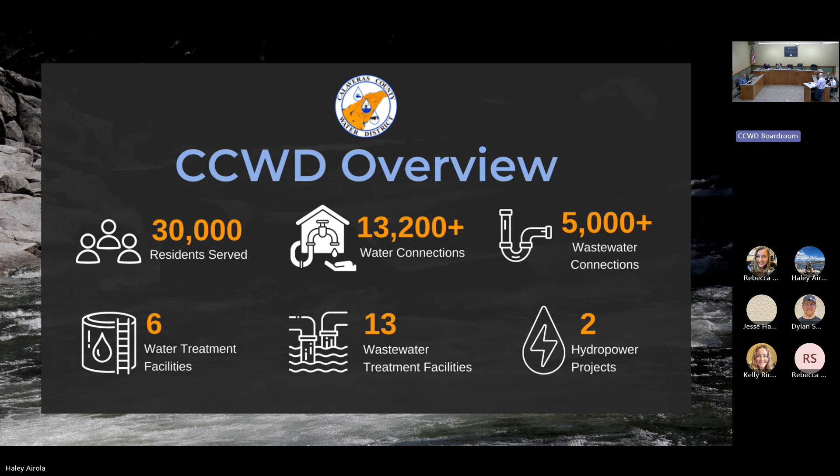So just a quick overview of CCWD. I think you guys have seen this slide before. Over 13,000 water connections, over 30,000 residents served. We have 6 water systems, 13 independent wastewater systems, soon to be 12. There's a lot going on, a lot of infrastructure across the county that we're responsible for, and fire hydrant O&M is another key component to ensure the success of our distribution systems.

We have 2,265 fire hydrants across those 6 water systems, and we work with the fire departments and their staff to have those inspected annually. So we pay a little under $60,000 a year to the fire chiefs and their teams so that they can go out and inspect these and report back to us their condition.

Part of that effort includes training on behalf of CCWD staff for new and volunteer fire folks and summer interns, so that we can ensure the water system stays intact while they inspect and check these fire hydrants. Here's an image of a previous supervisor out in the field conducting one of those training sessions.

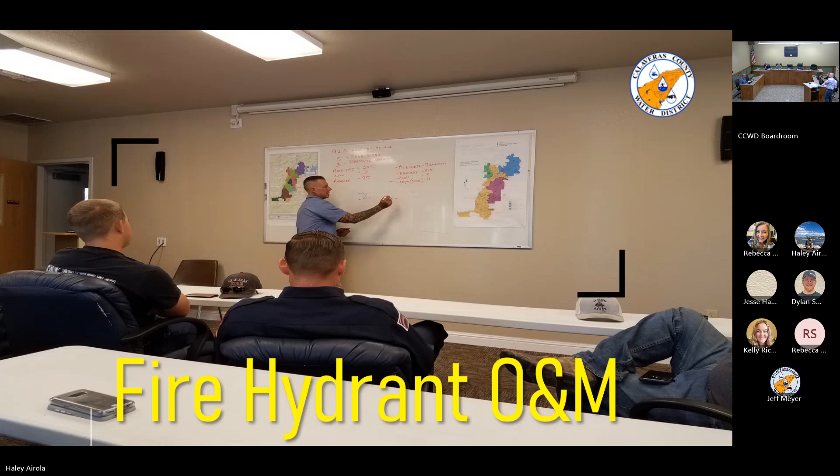So one of the challenges that we have out at Copperopolis and in the Jenny Lind water system is the presence of naturally occurring iron and manganese in the system. How those systems are flushed is really important. If when the hydrant is inspected, the folks just kick the hydrant on full bore, they can stir up settled manganese for hundreds of yards, if not thousands of yards in the system, and that takes hours to evacuate. So we work with the team to make sure that doesn't happen.

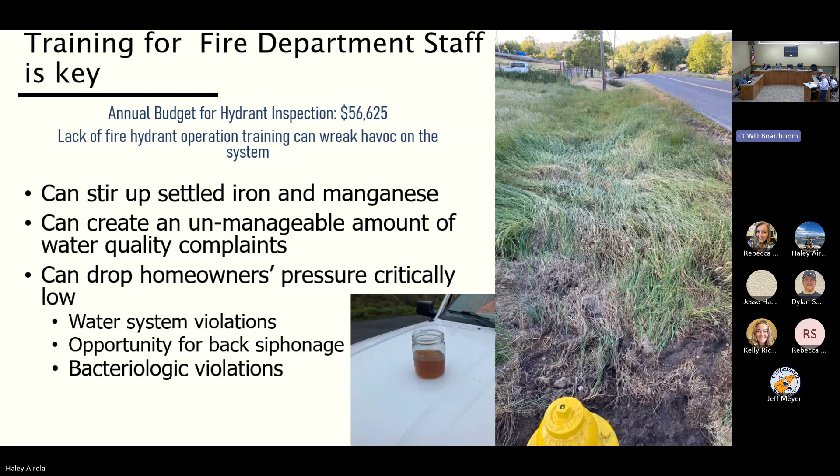So we work really closely with the fire folks to make sure that when they do inspect the hydrant, they focus on just basically giving it a burp test or a squirt test, evacuate some of the water that's just in the hydrant itself, and then statically pressure test it.

These images illustrate Chief Johnson, who was super helpful to our team about 6-8 months ago, wintertime. Our distribution crew went out with his interns up on the pass, and we went through some fire hydrant testing, super helpful.

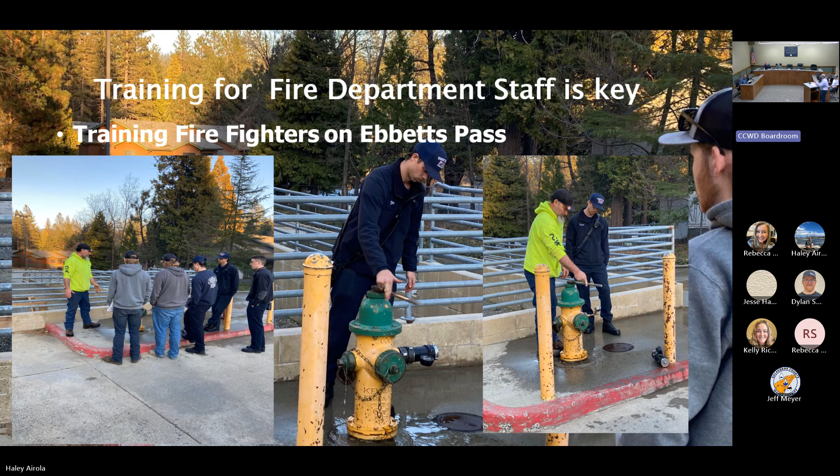I think it helped our folks develop a rapport with the interns, which is really important - it has to happen throughout the organizations. To this day, we get notifications here at the district every time your folks are out in the field to inspect, we get a phone call. We put our folks on notice so they can go touch base with whoever's going to inspect a fire hydrant. It's really helpful, and it keeps all of our folks informed.

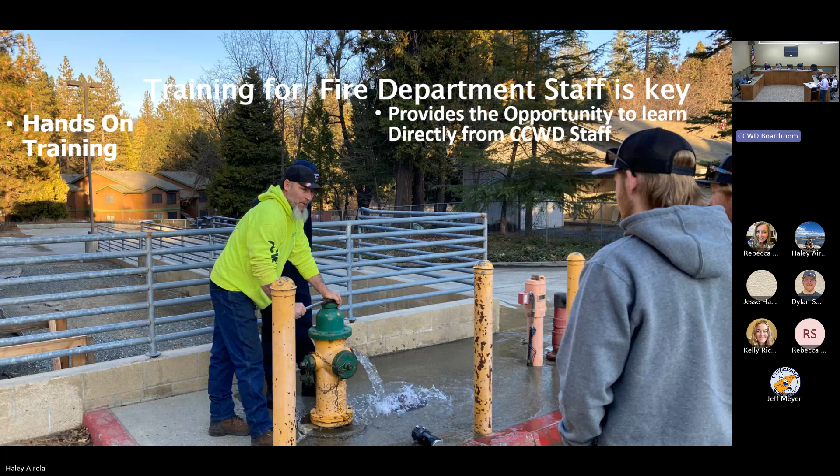This is an image of our supervisor up on the pass during the wintertime, Joe Darby, showing everybody how he would like to see things take place when it comes to fire hydrant inspections.

So what are the hydrants inspected for? This is an illustration of a sheet from the Calaveras Consolidated, I think it was Jenny Lind, their inspection form that they use. They look at operating condition, ease of access to the hydrant, roadway reflectors, burrs, is the cap hard to get on or off, is the stem lubed. They log the static pressure and note any anomalies.

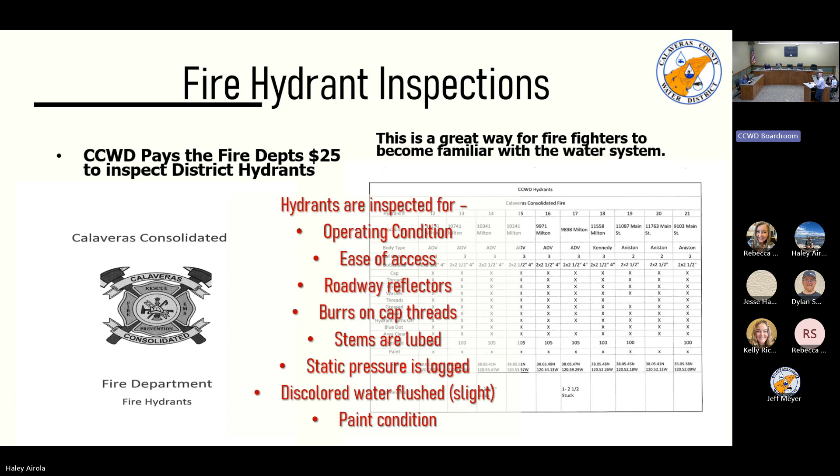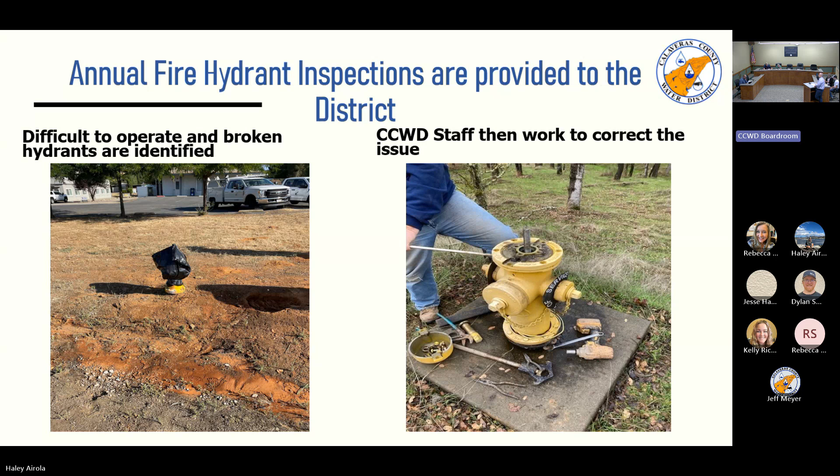This document actually informs our distribution and construction crews for hydrant replacements and rebuilds. The image on the left is a bagged, out of service hydrant. The image on the right shows our distribution folks tearing a hydrant down to rebuild it and put it back in service. The interrelationship between the fire folks and our distribution crews for that effort is super important.

One of the challenges we face throughout our water systems is a lot of the hydrants don't have guard valves or isolation valves.

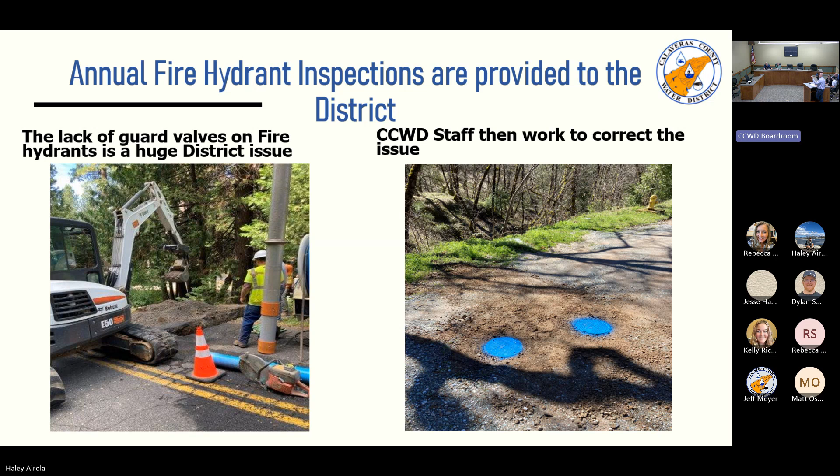So that's actually kind of related. We're talking about fire hydrant O&M in this presentation, but capacity, flow rate, and volume are also critically important aspects. I talked a little bit about PPCs or ISOs in this presentation, and that touches upon that aspect of the water system.

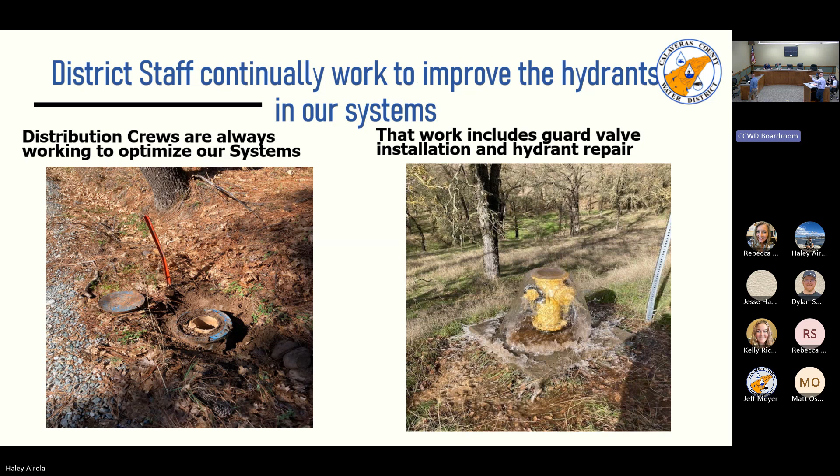Here's some more images of cleaning out a fire hydrant, basically taking all the internal components out and flushing it, then putting brand new internal components in. Luckily they have rebuild kits for fire hydrants. You can replace the bushings, valves, gaskets, O-rings and whatnot, and put it back in service.

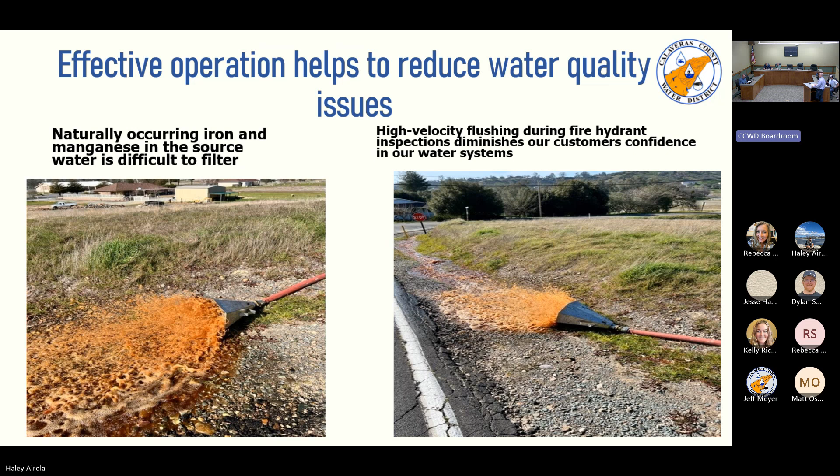Here's an image of manganese flushing. So like I said, continual effort. I think long-term consideration, this being the engineering committee, Kevin and I have talked about engineering the exclusion of manganese through a different process potentially in the future for the Jenny Lind and Copper Cove water systems.

Wouldn't you say that one of the most unfortunate circumstances of this manganese accumulation is customer calls? Absolutely, and the erosion in the confidence of the water supply. That's also a big challenge, which is why it's so important that we work together on flushing and on when there's issues, when you have to flow a line.

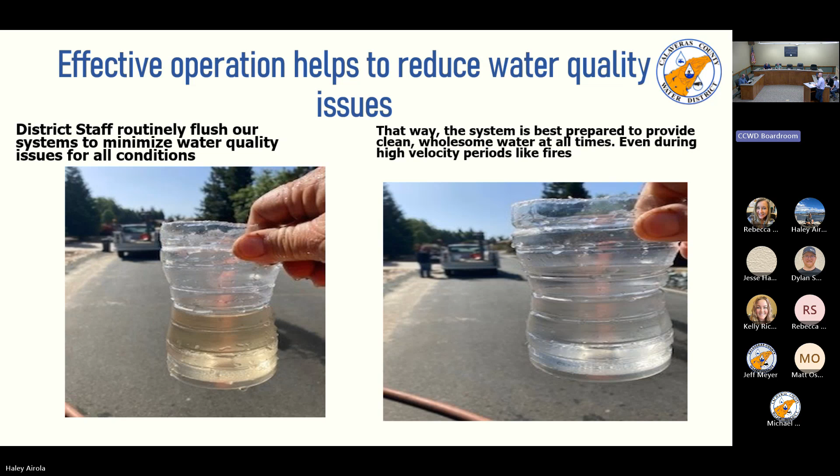The chiefs are great about calling us like, hey, we've got an issue, we've got a fire, we're rolling over here. We all talk, and then we can go back and forth and say, okay, everybody, let's go knock on all these doors to let everybody know there's going to be an issue here because there's an emergency. Folks get it, but at the same time, the condition of the water, as you can see, kind of like the before and after of flushing, really does have an effect on the public's perception of the water system and the water supply.

So yeah, here we go. That's hydrant O&M. We work together with the fire chiefs here and their teams, and I'm grateful for you guys to show up. Thank you all very much to ensure that the system's integrity is intact.

But the ISO rating is another equally important aspect of our relationship. This is basically an assessment of the fire department's ability to respond to an issue and address it. It's also called a public protection classification, and there's a ranking associated with ISO that has a direct correlation to folks' insurance rates in their systems or in our systems. It can be updated every 4 to 5 years, and the water component accounts for 40% of that ISO ranking or rating, so it's really an important component.

What is our ISO rating? I imagine it can be very- across the departments, I believe 3. Okay, 2, 4. So Copper is the 4. We want to get the lower the better, so it's like 1 to 10, I believe. Yeah, 1 is like, yeah. Do they give out? Yeah. I would think so in this county with the open space.

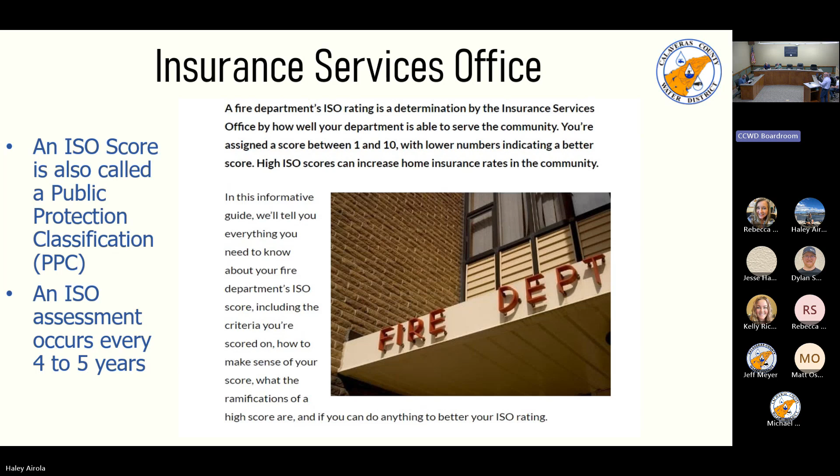So Chief Herzog, Copper, and I have discussed fire flow testing, and I think we've all talked about it, but fire flow testing is a considerable component of the water side. Being able to actually physically touch, flow, and test a hydrant's operation is a critical component of all of this.

It also helps us understand where the pinch points might be. We might have thought, because you can flow test one and it accounts for 5 other hydrants, I believe, so you can mathematically calculate the flow rates of those others. But what flow testing does is allow you to either fact-check or correct the story, and then you have to adjust based on that. So the engineering team, that's when you guys come in, and we work together with ops and engineering to create projects that improve the system.

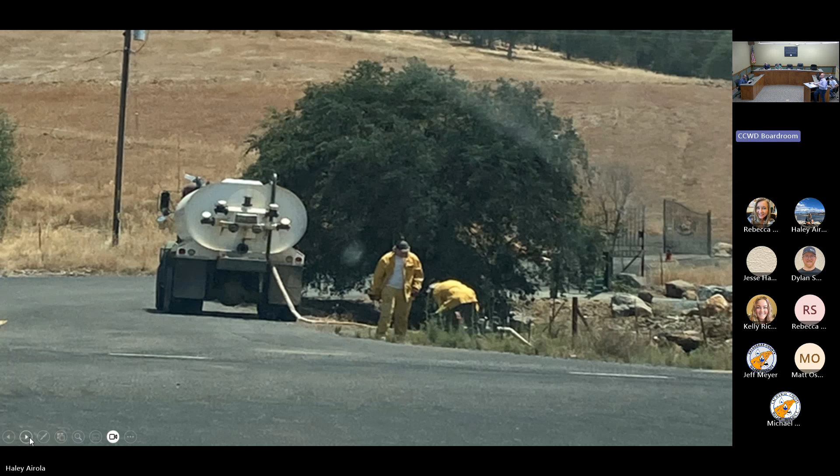So this is just a picture of one of our hydrants being used during that fire. And you can see from the mud puddle in front of this hydrant that this one was heavily used. This was on Main Street in Copper, and it's just getting hammered to great effect. That's what they're there for.

So where are we now? Apologies for the white text, but we've replaced 18 hydrants since January of '24 - 6 in the Rancho area. Currently, Copper has 1 out of service, Jenny has 1 out of service, and Ebbetts Pass has 7. We're working to schedule some fire flow tests. Not on this list is that we included 10 additional new hydrants in the capital outlay of this most recently approved budget. So we'll continue the effort of replacing fire hydrants throughout all systems and working to eliminate all those out of service hydrants, and working with the fire folks.

Moreover, the county is working on its wildfire prevention plan, and the district is really focused on being involved in that, as all the fire folks are. We want to be able to be there and provide some input where necessary. So that's it.

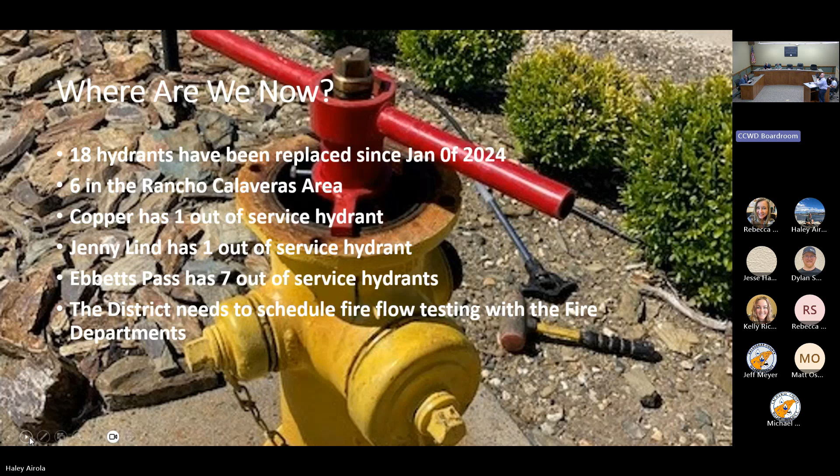Do all these hydrants have breakaway bolts? Good question. Yeah, pretty much all of them. I think there's some old ones out there, but probably less than 5%.

I know a few of these guys in the audience, but I'd like for them to stand up and introduce themselves for the purpose of our... Come on up to the podium. Come on up.

Mike Johnson, Ebbetts Pass Fire District. Richard Dickinson, Calaveras Consolidated Fire. Scott Herzog, Copperopolis Fire. Hi, Scott. Mine will take the longest - I'm John Parks, Deputy Chief of Altaville Fire, the Fire Marshal, Deputy Chief of Copper, Vice President of the Board of Murphys Fire District, and your Bret Harte Fire Technology Teacher. What do you do in your spare time? Test fire hydrants.

So the 7 hydrants that are out of service in Ebbetts, is that partially because they don't have the isolation valves, or? Yeah, it could be isolation valves. They could be hard to open, so they just need to be replaced. There could be corrosion there - any number of things. I'm not sure the specifics for each one of those hydrants, but generally there's going to be something associated with no isolation valve, broken operating nut, broken stem, hard to open, hard to turn - one of those things. That just seems like a large number in a small area, but a big problem.

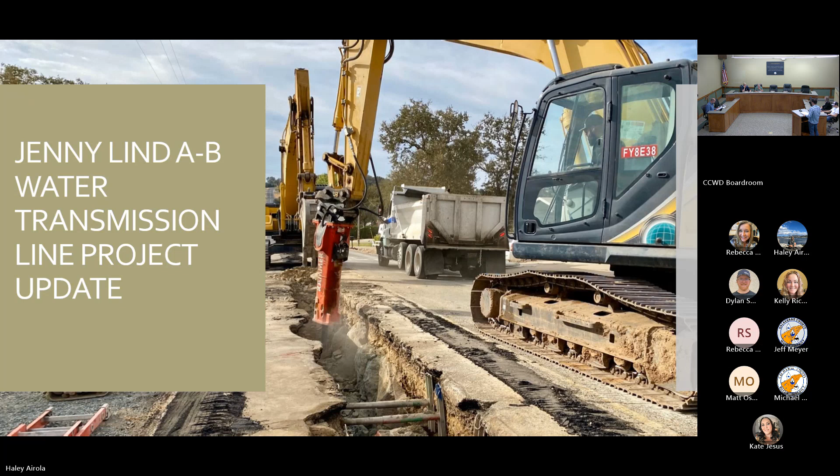I'll start by giving a quick visual overview of the project. The project includes somewhere around a little over 20,000 feet of linear force main that we're going to be installing. It adds 5 pressure reducing valves and around 210 service line replacements as well.

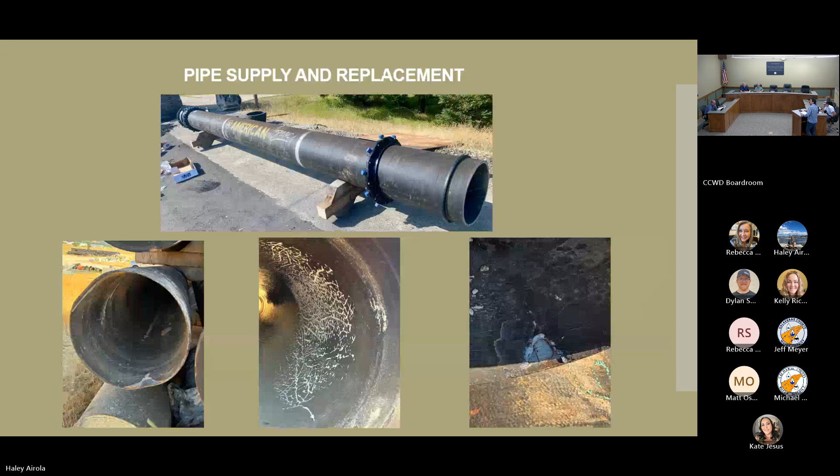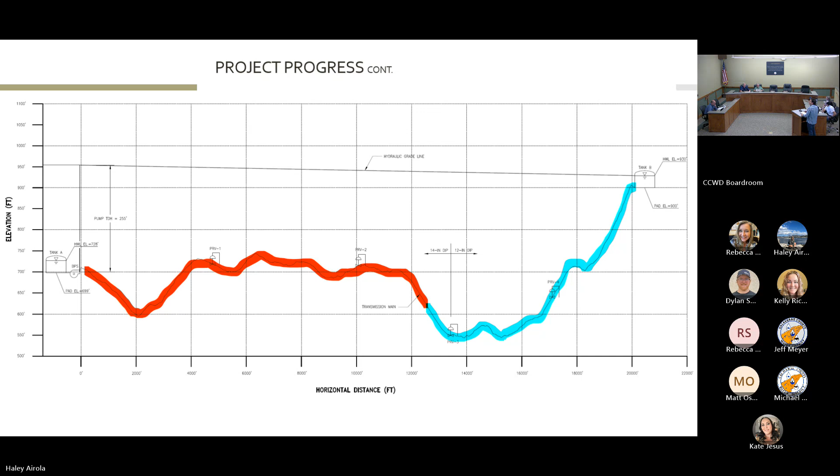It looks like there's been some patch paving alongside the larger ditch. Was there piping that had to be removed? Those are plates, director. When they do the digging, sometimes they use a steel plate along with some of the old asphalt. Yeah, on each side of the ditch, those are just to make it drivable. The steel plates are 12 by 12. But yes, there is a lot of patch paving existing in that road because of our existing water system and the repairs that have taken place there. That's also something that will end up being addressed when the service lines are replaced—those will all get plug paved, and then the final pave will cover those.

To answer your question on rock, I don't anticipate that the rock is going to become any less. We may come across a couple more fill areas where we can get some good footage, but from here on out we're going up the mountain, and with the outcroppings that you can see existing, I don't think you're going to run into any less.

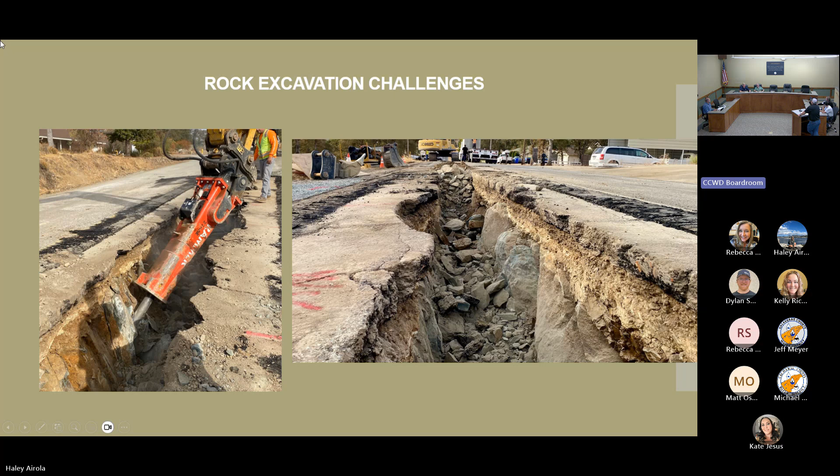I saw this before the meeting and I was kind of skeptical about just giving them a blank check, so to speak, for extra rock removal. But he pointed out that it's not a blank check, that he's documenting every minute.

It's been a challenge. I would like to add that we're going to bring it to the full board, a change order to add more funds for the rock excavation. Okay, so that's coming. It's coming, yes. Not at this time. There will be no opposition from this group.

Kudos to Jared and Juan for being right on top of this project. It could have gone badly, and we're going to get the product we need because of these guys being on it.

One question that I have - has the pipe that is in the ground been tested sequentially? I'll let Jared answer. Yes, with the problems that we had with the pipe, now we're testing it every 1,000 feet, and then we plug pave to get the cutback out of the roadway and somewhat restore the road for the public.

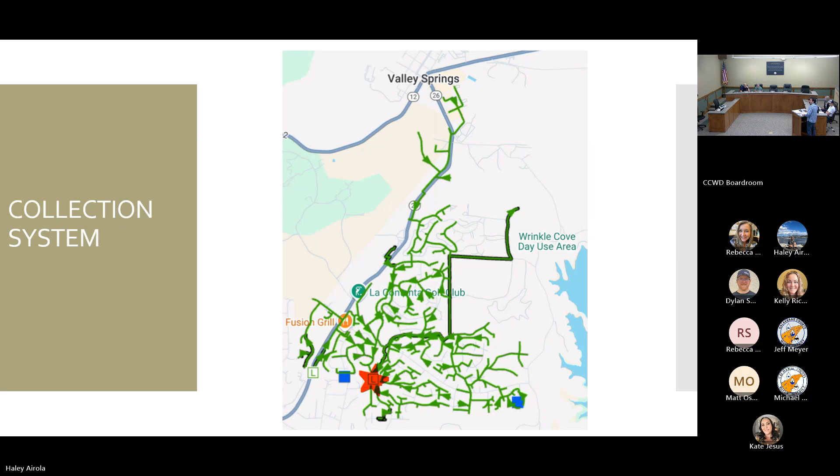So we teamed up with Loomis Engineering, or Loomis and Associates, for the design of the Huckleberry Lift Station. Some of the major improvements that the lift station is going to include, I put in red boxes, and I have a series of red boxes coming up so I can talk a little about them.

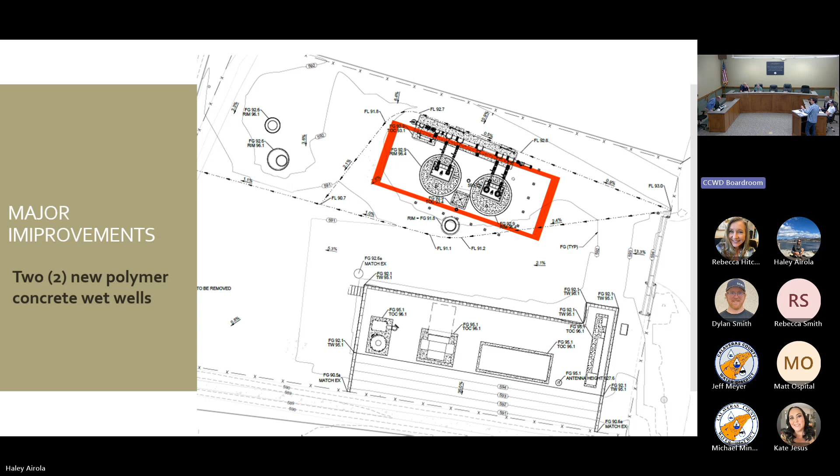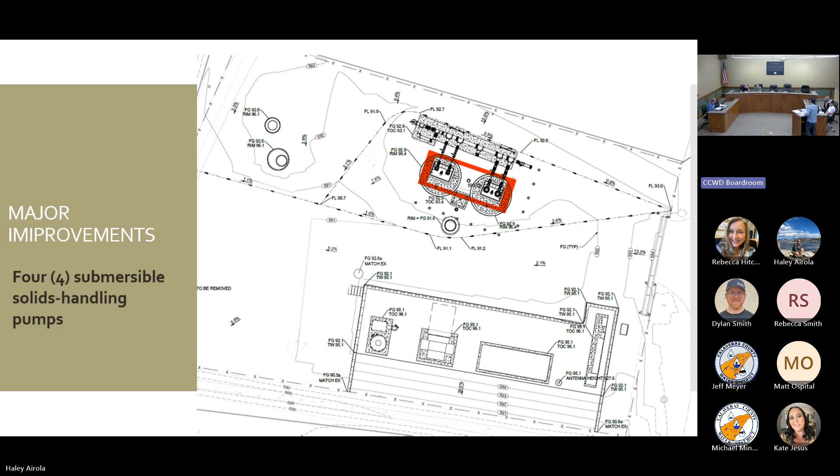It's going to include 2 polymer concrete wet wells, and 4 submersible pumps. I'm going to present the isometric view of the wet wells and the pumps. It's going to include a transformer. I may add that a lot of these items are not set in stone yet. We are talking with our electricians in-house and with our ops department about how we're going to place these items, so this is just an overview of it.

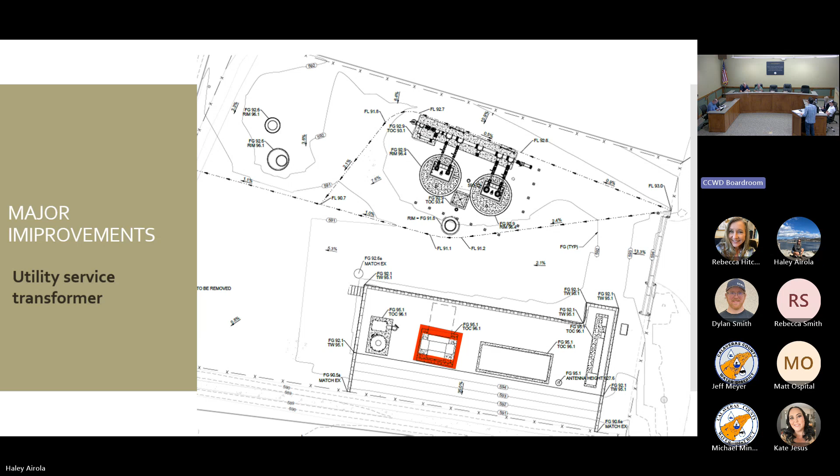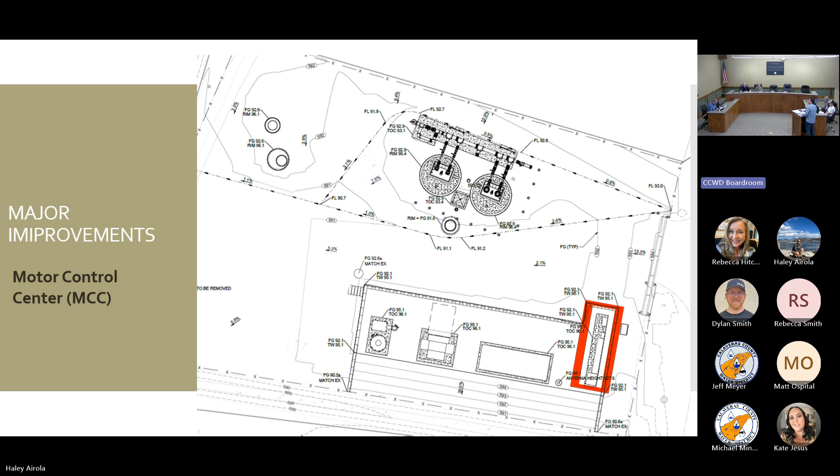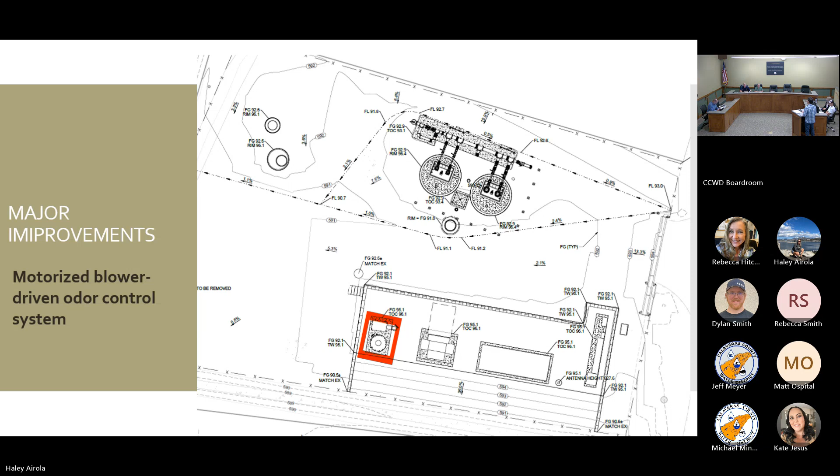It's going to include a new diesel powered generator for backup power, and all the controls necessary for the pumps and the electrical system. It's also going to include a blower for odor control, because the lift station is in a neighborhood, so we don't want the neighbors to have to smell it.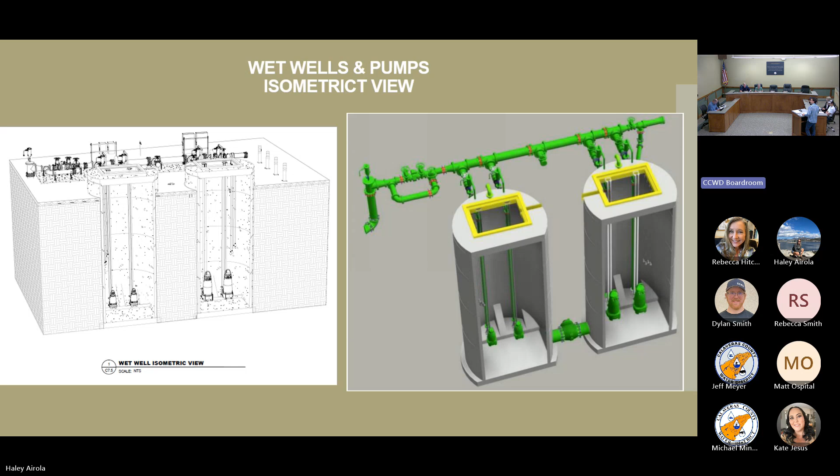This is an isometric view of the wet wells and the pumps. As you can see, there you've got 4 pumps, 2 pumps on each side, and they're connected. This is how it looks from the top.

I want to go back to see if my understanding of this whole thing is accurate. Back in the previous discussion with the hydroscience proposal, there was a table, 5.5-1, showing about $8 million worth of Huckleberry Lift Station replacement cost estimate. 8 million. So is the Loomis proposal going to not consider this 8 million replacement cost estimate? Are we talking about 2 different approaches on the Huckleberry Lift Station?

As far as I know, that estimate for the Huckleberry Lift Station includes contingency, so the direct project cost is $6 million, and there's contingency because construction is still 2 years out and there are still some unknowns. That was at a 50% estimate, so we put the contingency in there, and now we're at this $6 to $8 million range. The original estimate came in at 10 million, but we've been working to value engineer it down. So does that answer your question?

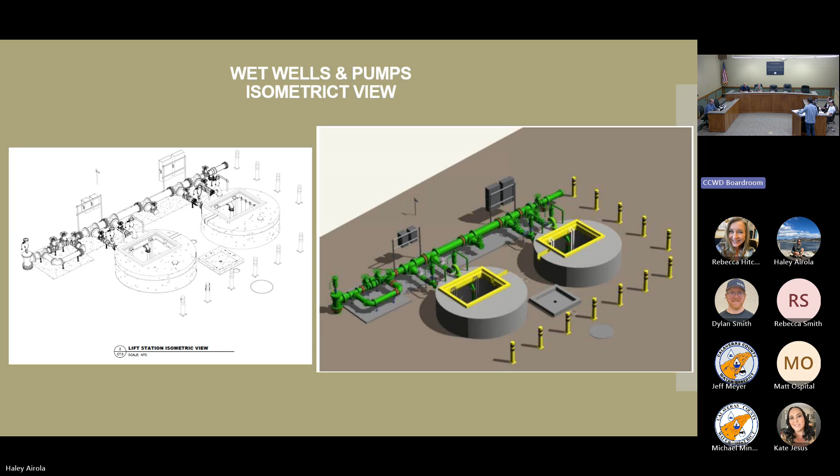Sorry for the interruption here, John. No, that's good, I learned something.

During the design process, working with Loomis and Associates, we did a test—a force main flow and pump station test of the existing equipment. We met with the operations teams, shut off the pumps, and let the level build up at the lift station. Then we started firing pumps one at a time, so we could see the pressure build up on the 12-inch force main and the pressure the existing pumps can create.

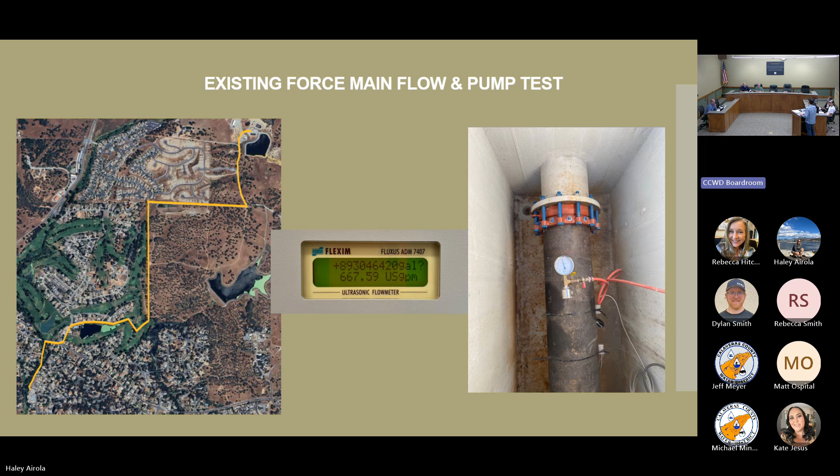What we're looking for is, because we're going to put a new lift station there, we want to make sure the existing force main can handle the flows and pressure from the new pump system coming in.

A surge analysis was created. As you can imagine, Valley Springs has a lot of ups and downs with the force main. Every time you go up in the hills, they added air relief valves and vacuum breakers. If you picture the top of the hill as a concave point, if a breakage happened below that and you don't have a way to stop the flow, you could essentially create a siphon and bring all the sewage from the 12,500 feet of 12-inch pipe into one location. That can be pretty bad.

So what was designed back then included check valves and air relief valves. You want air relief valves because air always goes to the top. If air gets into a sealed container, like a bubble, it stays up. So on those force mains, if air gets into the system it can actually create cavitation on pumps and higher than normal pressures.

So we add these air relief valves at the top of the curves to release the air. But if there's a breakage, the air release valve and vacuum breaker could break the vacuum and release all the fluid, so check valves were added back then.

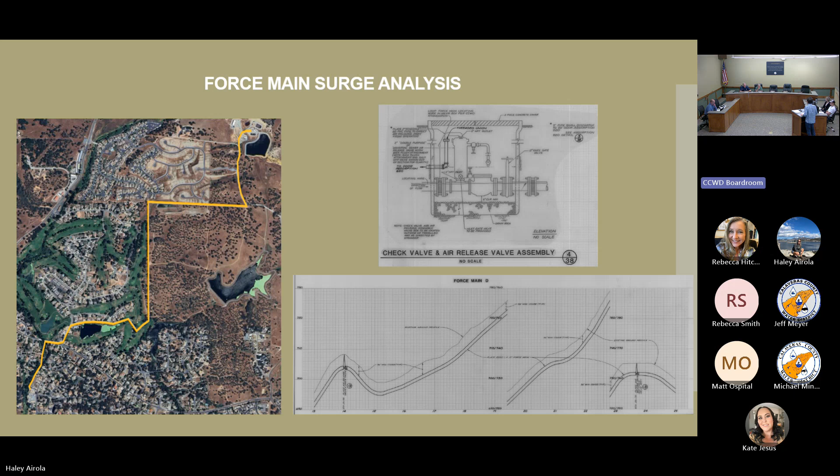Some of these efforts, for example the 12-inch force main testing, were completed for the same reason—if we put in a new lift station, we want to make sure the rest of the system can handle it. That concludes my design presentation.

Simple question, just out of curiosity—when you say polymer concrete wet well, is that a polymer additive to the concrete that makes it stronger and more waterproof? Yes, that's my understanding—waterproofness more than anything. In addition, I believe there are coatings you can add to the exterior of the concrete to make it less permeable.

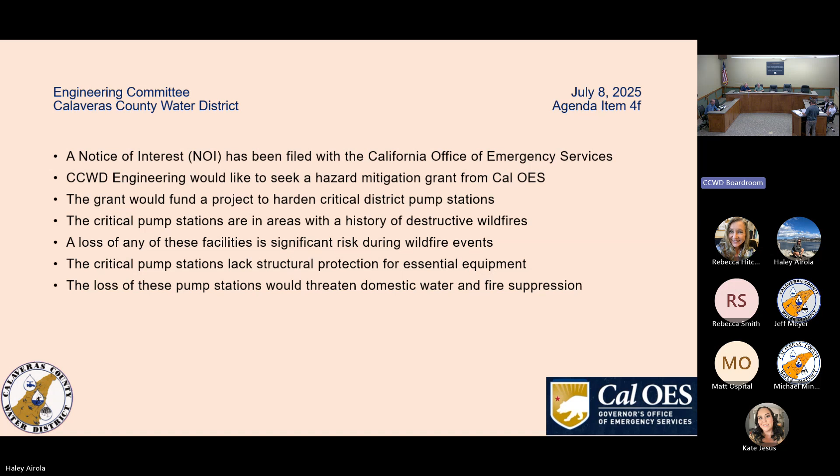The grant is for fire hardening. We're in an area of historic destructive fires. California in general, but Calaveras County is a lot like Butte County, where I'm from, with rugged topography and an area prone to fire. Hardening these pumps helps us fight those fires.

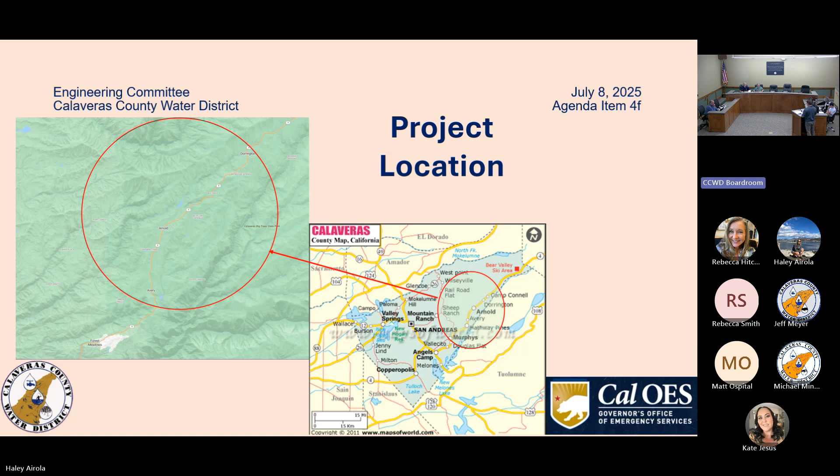Inside your packet in this PowerPoint, you'll see where the project area is. It starts up at Sheep Ranch, comes down Sheep Ranch Road, where there's a timber tank on top of Sheep Ranch, then comes down to Timber Trails where there's a pump station, and then there's 2 pump stations up in Big Trees as well. So that's the Sheep Ranch pump station, Timber Trails pump station, and Big Trees 1 and 4 pump stations.

Alex, are you the one drafting this grant application? Yes, I am. Some of it's already been done by Kevin, so I'm dusting it off. I have to redo the sub applications mostly, and also have to do what's called a benefit cost analysis, which we do for every project, but this is the state version, the Cal OES version that goes along with it.

I would assume that something like this would be high on the list of priorities — your percentage of success is pretty high, I think, for this type of protection. Well, my success in getting grants — yeah, success on this particular grant application — are you confident about it? Yes, I feel good about it.

I've done grants in the past. I was doing more design work and construction management for the last few years, but I feel good about it.

I'm, of course, still new as a director, so the 3.5 million, which would be our contribution — is this something that's in our overall operating budget plan, or is this all new? It'd be new money for us.

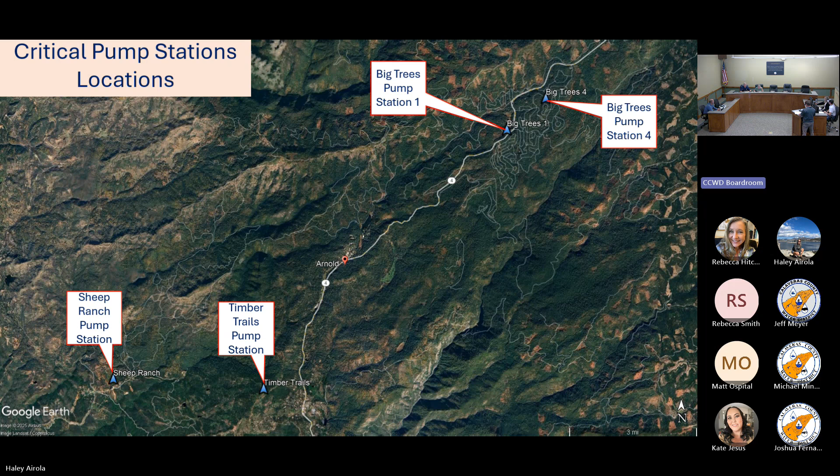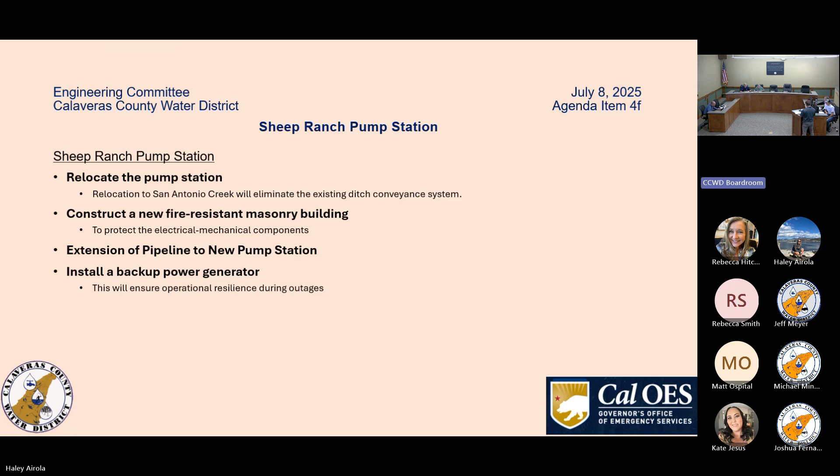All right. What do you need from us on this? We need concurrence.

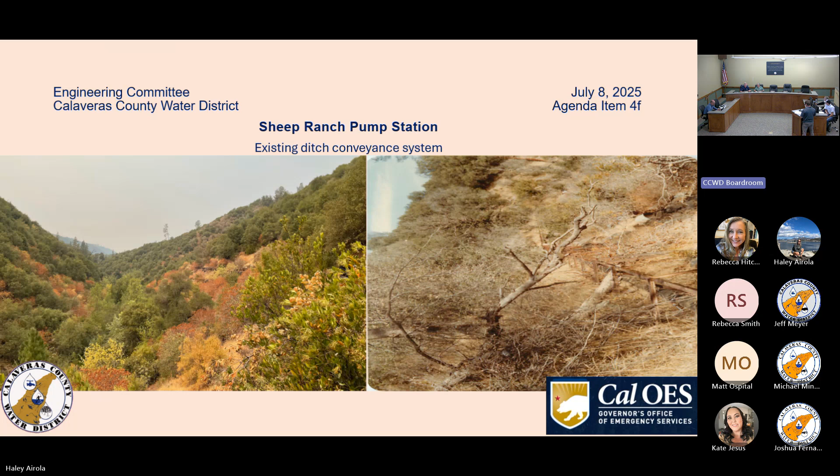All right, well, we have concurrence of this committee then. So, speak ahead.

Okay, moving on to 4G, notice of intent, UPUD, emergency intertie.

Yeah, so I was going to talk about this project we're working on. I see Matt on the line from Weber, WGA, they're a district engineer for UPUD. So the notice of intent, this is another FEMA grant opportunity under the same disaster declaration that the one we just talked about was under.

So whenever there's a disaster, they allot money to this hazard mitigation program, which brings in money to prevent these catastrophic failures of infrastructure that are related to wildfires. The CCWD has been working with UPUD on a joint emergency intertie project.

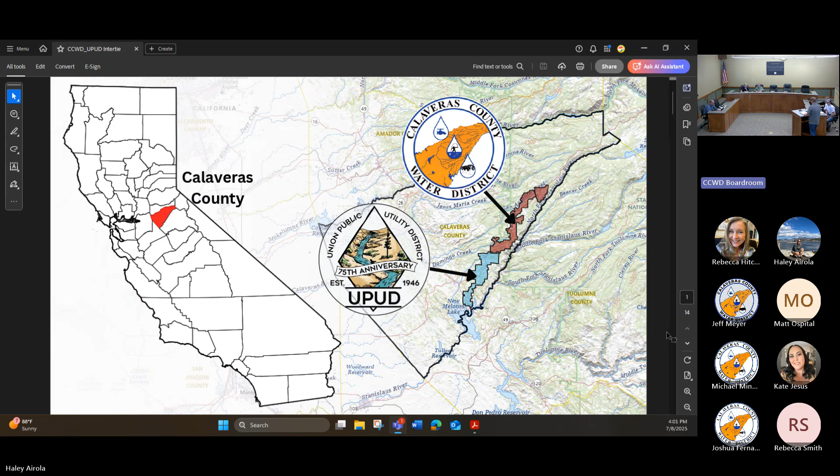And why it's needed: UPUD relies entirely on a wooden flume system from the Utica water source at Hunter's Reservoir. The flume is aging, exposed to fire risk, and vulnerable to failure during storms, droughts, and wildfires. Currently, UPUD doesn't have any backup water supply, so they rely entirely on that system. There's new legislation that requires you to have a backup water supply for systems over a certain size.

So the proposed project requires a lot of upgrades to our system in order to supply the demand to UPUD. We'd have to construct a larger clear well to increase the storage capacity, and also the chlorine contact time.

We'd have to add a third filter. Currently we have 2 filters, 2 million gallons each capacity, 2 million gallons a day. We had to add a third one to have 6 million gallons a day. And then we have to install a 4th effluent pump at the treatment plant in order to pump enough water out of our treatment plants to supply water to them and us.

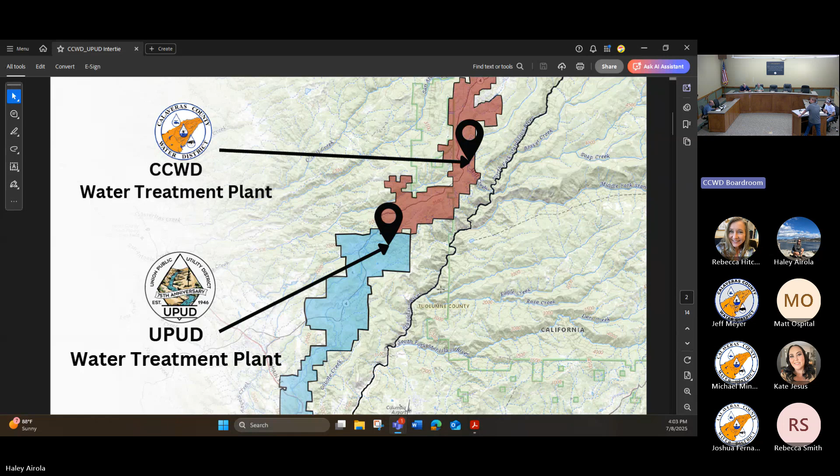So the upgrades would allow treated water from CCWD to be transferred to UPUD. You can see up here on the map, our systems pretty much connect. We have our treatment plant, there's the water treatment plant, and then their treatment plant. You go slow.

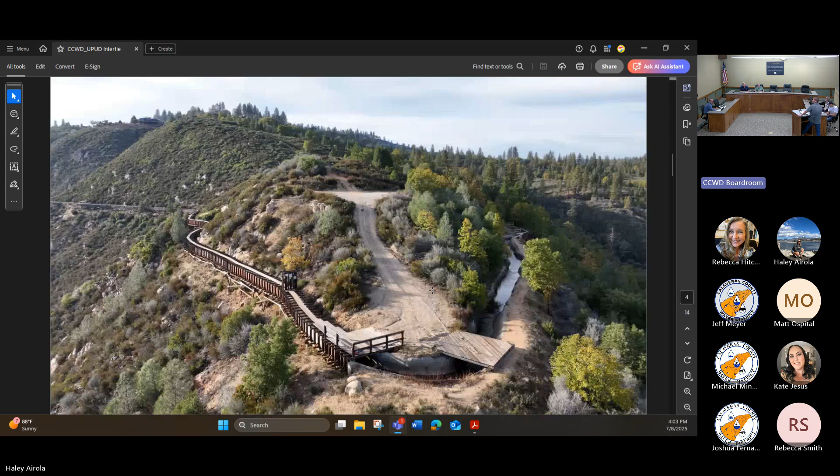So basically, here's the current conveyance system: 27 miles of Gold Rush era wooden ditches and wooden flumes. That's how they get the water down to their storage pond. Here's a picture of the wooden flumes, you've probably seen lots of those pictures. And then here's the burnt one up in the Darby fire.

So that's kind of what we're basing UPUD's grant application on, this hazard that happened in the past. There's more of it right there.

Grant's not for any of the water conveyance? Yeah, it would be for pipeline from our system to their system. So we can show that here in a minute.

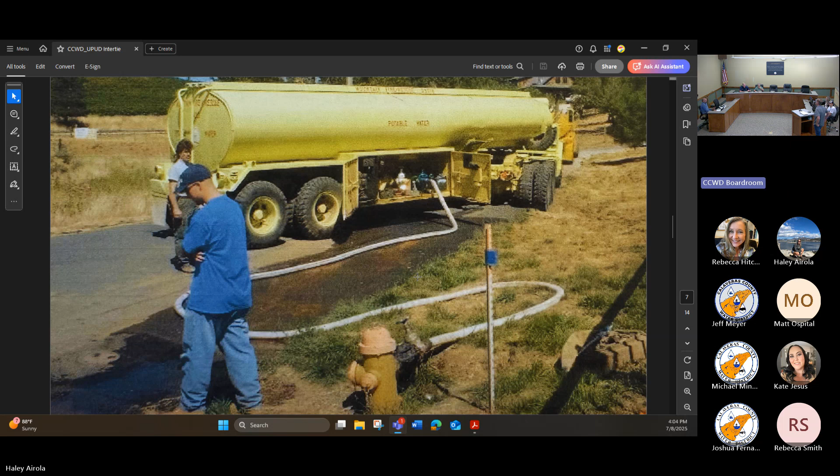So this is during the Darby fire. We had tanker trucks coming from our system, delivering some water down to their system, around the clock, they hauled water.

A picture of dumping into the fire hose from the Ebbetts Pass system. So they're not too far apart.

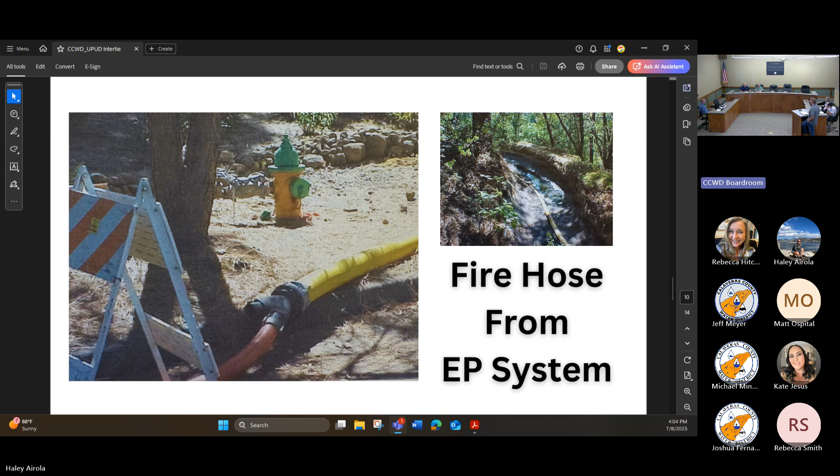We can go to the next slide. This is the presentation we gave to FEMA to explain the grant application, and they were really excited about the opportunity to potentially fund this project.

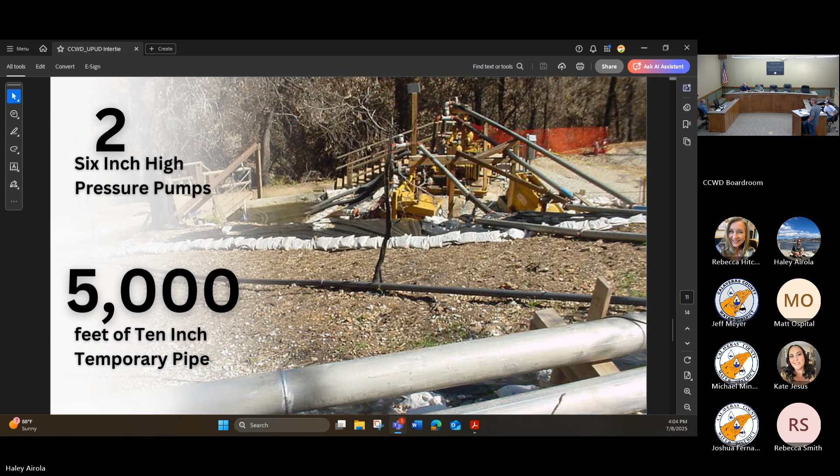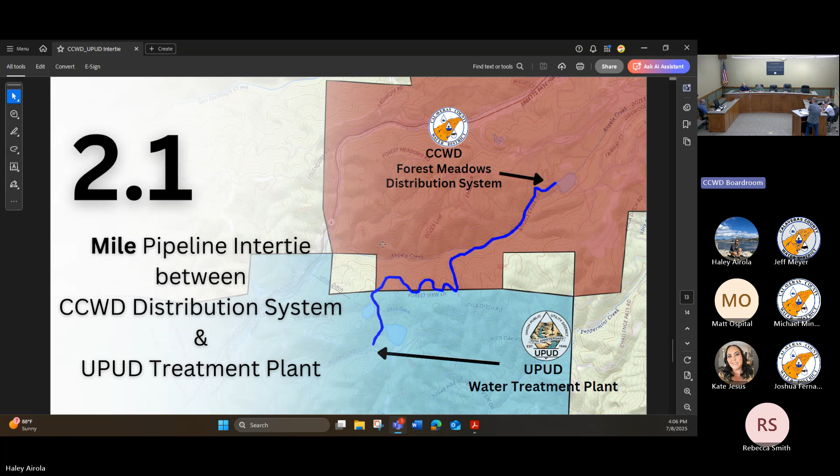If the grant is approved, what's our contribution? Since it's a disadvantaged community, there's a potential it wouldn't be a 75-25 split, it could be a 90-10, so the cost share would only be 10% of the cost. So that's an opportunity.

Like our projects in West Point, our hazard mitigation dam raise project that's under the same program, we've been very successful with this program. We replaced 5 redwood tanks in Ebbetts Pass under this program. We got the Hunter Reservoir, which is in the process of hopefully final funding, and they paid for the design. It's a new raw water treatment plant there. They're paying for our dam raise project in West Point, Wilseyville. So we've been really successful on this front across all our projects, and they've replaced other redwood tanks in the past.

So this is kind of the outline. There's 2 options. A few years back, we completed the Reach 1 pipeline. It went down Highway 4 and ended at our last customer there, you can see where that is. So one option would be hard, but you'd go down Highway 4 with a pipeline through the narrows and Utica grade, and connect right into their distribution system.

That would probably be the most robust system. The other option would be the backside of Forest Meadows. You go cross country, there's an existing road that goes to their treatment plant, and you could send water out the backside of Forest Meadows. Smaller pipe, maybe not as much flow, but we're working the hydraulic models together. UPUD is doing a hydraulic model, and we're doing a hydraulic model, so that will give us the best solution. It could be that we have to do both, but that's probably not what's going to happen.

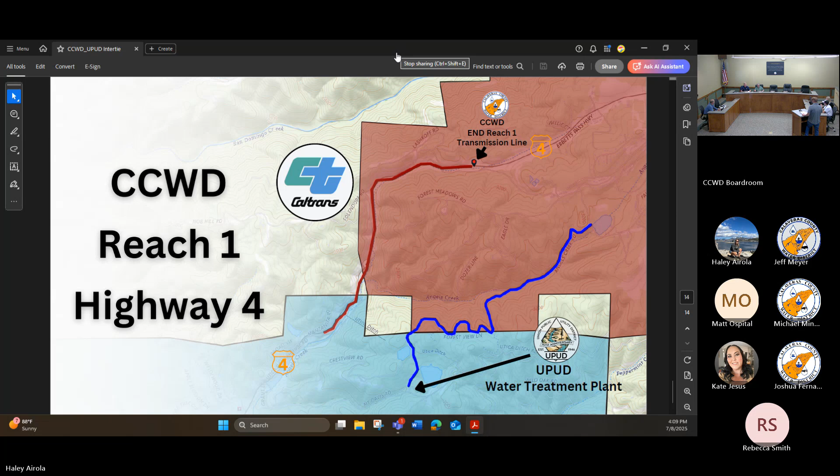It's just a matter of moving forward. We have a blanket board resolution that allows staff to apply for all these hazard mitigation grants without taking it to the board, but we like to keep you guys involved and informed on stuff we're spending work efforts on.

Michael, I have a question for you. On the Reach One project, I recall there was a decision made to run a 6-inch pipeline down Highway 4 in anticipation of something. No, Reach One is a 12-inch transmission, and the original plans had it back down to 8 inches, I think.

The last time, back to 12 inches. I wish, in my perspective, we'd made it 20 inches for the whole length, but that might have caused some issues and additional costs for CCWD at the time. But it also made supply possible.

I think now, with what we have being a brand new 12-inch main, it's been functioning great since we put it in, thanks to Jared and the team on that project, just like his other projects, staying on top of the contractor and making sure we have a good project. But it's going to have its limitations.